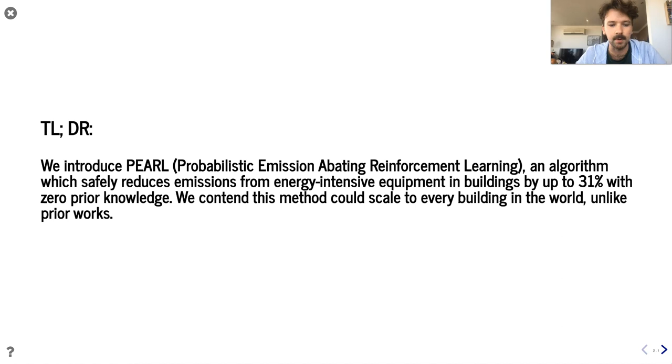The TLDR of this work is as follows. We introduced PEARL, Probabilistic Emission-Abating Reinforcement Learning, an algorithm which safely reduces emissions from energy-intensive equipment in buildings by up to 31% with zero prior knowledge. Because we can bypass the previously held requirement of historical data or access to a simulator for each building we'd like to control, we contend that this method could scale to every building in the world, unlike prior works. If this is interesting to you, please listen on.

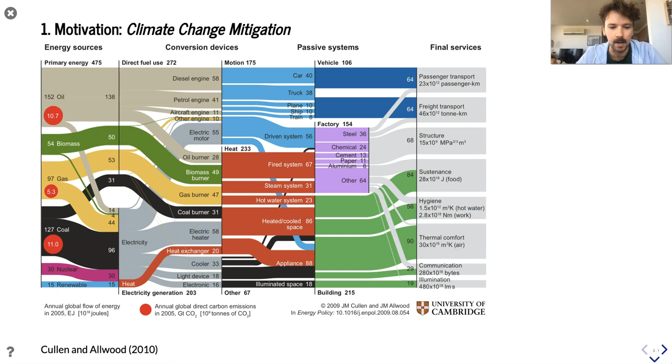I'll begin by motivating the problem, with the first motivation being climate change mitigation. Here's a map tracing the global flow of energy from primary source on the left-hand side of the screen to final service on the right-hand side of the screen. If we focus on the middle slice of the diagram, we see that global energy use can be stratified into one of three categories. Energy used to create motion in cyan, energy used to regulate temperature in red, and energy used for everything else in black.

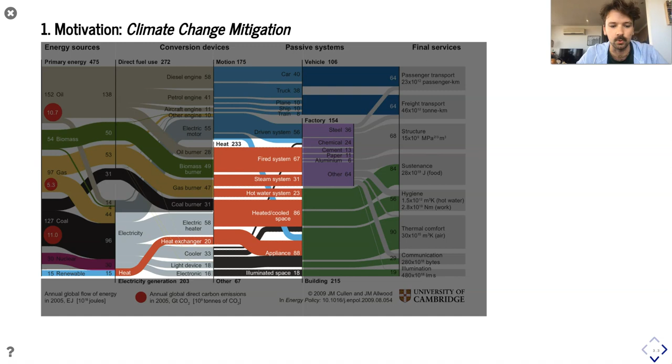We can observe that the primary source of energy consumption globally is in regulating temperature, approximately 50% of total energy demand. Finding ways of regulating temperature in society more efficiently could prove a useful way of reducing energy and thus carbon emissions. Another part of the diagram I'd like to draw your attention to is the blue section labelled renewables in the bottom left. Though renewables contributed to a small percentage of global energy supply when this diagram was produced, using data in 2005, the IEA expect renewables to contribute to 75% of global energy supply by 2050. Such a high penetration of renewables on the grid will cause problems related primarily to the stochastic nature of renewable energy generation, often a problem called intermittency.

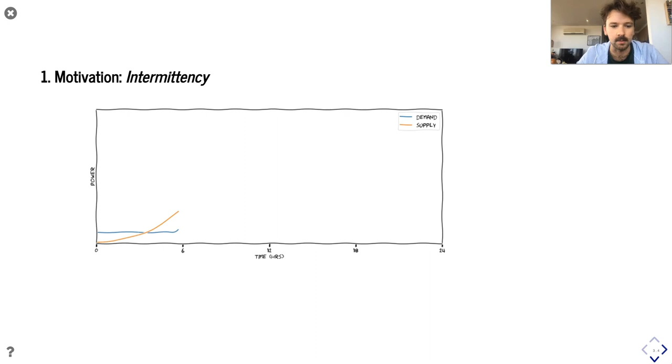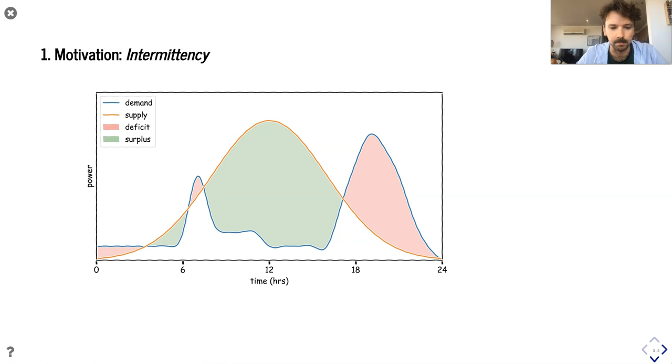To explain intermittency, consider the hypothetical scenario of powering a home using only a solar array located on its roof. Here we plot demand for energy in blue and the supply of energy from the solar array in orange for 24 hours. On a perfectly clear summer's day, the energy supplied by our array will increase in the morning as the sun rises, peak around midday when irradiance is highest, and fall in the evening as the sun sets. In contrast, the occupants' demand for energy won't be so symmetric. They'll likely produce a peak in energy demand in the morning when they wake up, a plateau in the middle when they go to work or school, and a second peak in the evening when they return. These mismatched curves create periods where demand exceeds supply, and the national grid will need to cover the deficit by spinning up fossil fuel-powered reserves, creating unnecessary emissions that could have been avoided.

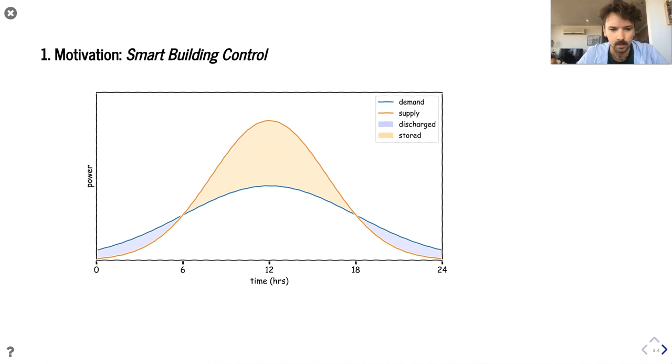Here's an illustration of an idealized scenario. Now we've added a storage medium, either electrical or thermal, and we flattened the blue demand curve, spreading it throughout the day rather than allowing the peaks in the morning and evenings. Clearly, traditional controllers cannot perform this optimization, so we need new techniques. A well-studied solution is reinforcement learning, which can solve this problem given arbitrary compute or data.

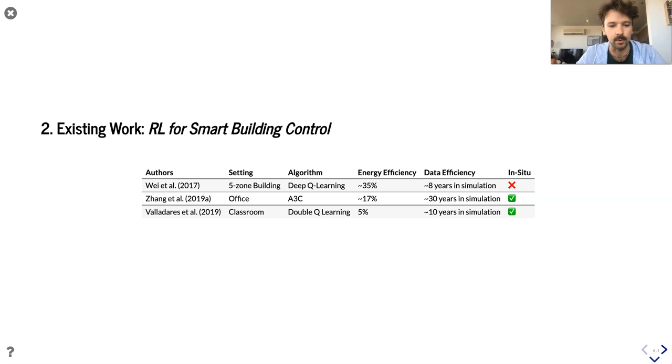Here I detail three of the seminal works in the RL for smart building control literature. Some authors report RL can improve energy efficiency by up to 35%, but all past works require pre-training of their agent in simulation prior to deployment. Such simulators can be difficult to construct, requiring lots of prior knowledge about the building, which can take an expert months to obtain and distill into a model using the favoured software, EnergyPlus. To get around this bottleneck, some authors have reported results where the agent is deployed in the building without pre-training. In our paper, we call this zero-shot building control.

Lazic and authors grant their agent a short commissioning period of 3 to 12 hours in the real environment to collect data and build a model. Their approach is suitably general for scale deployment, but only improved cooling costs by 9%, likely because they use a linear model that erroneously linearized the nonlinear thermodynamics of the data center.

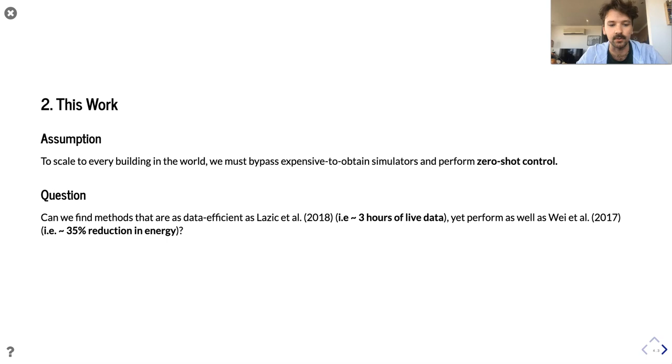So this provides the context for our work. Here we make one guiding assumption. To scale to every building in the world, we must bypass the expensive to obtain simulators and perform zero-shot control. This begs the question, can we find methods that are as data efficient as Lazic, i.e. that use 3 hours of live data to build a model, yet perform as well as the agents trained in simulation, i.e. showing a 35% energy reduction?

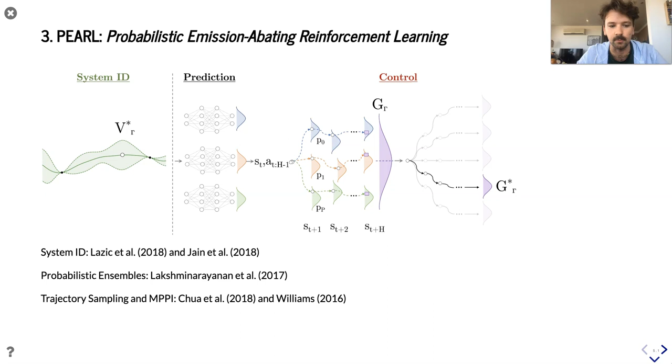In this work, we answer our question with a new approach called PEARL. PEARL performs system identification during a 3-hour commissioning period, maximizing information gained by exploring parts of the state action space where the model is least certain about the one-step dynamics. Its model is an ensemble of probabilistic networks which it uses to plan via model predictive path integral and trajectory sampling. PEARL learns the system dynamics online with no prior training.

We seek to learn a mapping F from current state and action to next state. Our model is an ensemble of probabilistic networks outputting a multivariate Gaussian over the state space. The Gaussian allows us to quantify aleatoric uncertainty in the predictions, and the ensemble allows us to quantify epistemic uncertainty, with the idea being that this improves data efficiency when operating in the online regime. We train the networks with the standard MLE loss.

We plan by combining model predictive path integral, a form of model predictive control, and trajectory sampling. At each time step, we sample action sequences from an initially arbitrary Gaussian with mean mu and scales sigma. We pass these action sequences through our models p many times to get a distribution over the state action space at horizon h. This distribution gives us an expected reward for an action sequence, which we can compare with many other sampled action sequences to find our expected optimal sequence.

During system identification, i.e. our 3-hour commissioning period, instead of optimizing for expected reward, we optimize for predicted variance across particles. The intuition here is that higher variance in our predictions means higher model uncertainty, so collecting data in this region of the state space maximizes information gain.

We formulate the problem of building control as a standard MDP with the usual state space, action space, reward function, and transition dynamics. Our reward is a linear combination of an emissions term and a temperature term. The emissions term is the grid price times our energy consumption at time t, and our goal is to minimize it. The temperature term is 0 if the temperature in the building falls between the safe bound defined between T low and T high, which are in practice set to 19 and 24 degrees centigrade. If the temperature falls outside these zones, the agent receives a large negative penalty in proportion to said deviation.

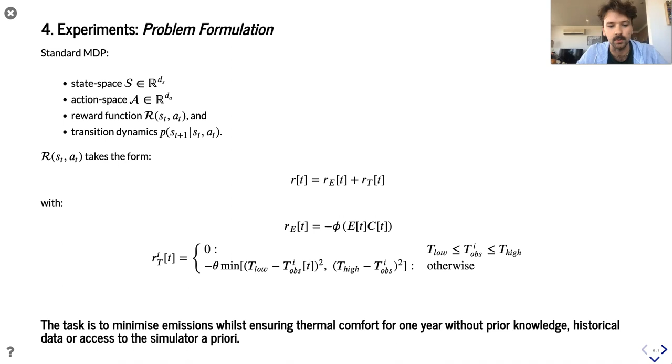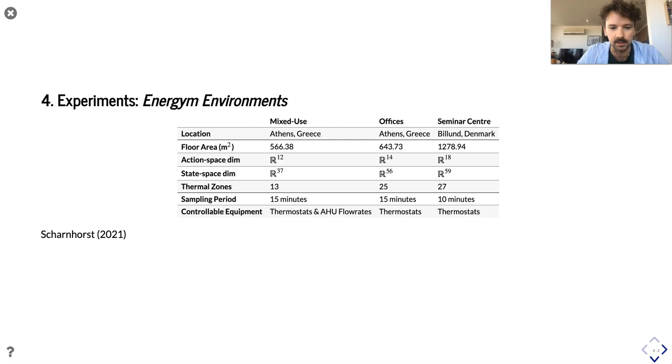We perform experiments in Energym, an open source framework for testing RL algorithms in simulation. We use their mixed-use, office and seminar center environments, which have varying sizes, equipment, and thermodynamics. Our baselines are 2 model-free algorithms, SAC and PPO, 1 model-based algorithm, MPC DNN, and the existing rule-based controller. We also baseline against an oracle, which in this case is a pre-trained SAC agent with hyperparameters optimized for each environment and trained for 10 years prior to test time. Our oracle represents performance in each environment with the constraint of no knowledge a priori relaxed.

We find PEARL minimizes emissions in the mixed-use facility, reducing emissions by 31% compared to the RBC. In the office environment, PEARL outperforms each of the RL agents but is beaten by the RBC, and in the seminar center, all controllers perform almost identically.

From a temperature perspective, PEARL outperforms all of the other RL agents, controlling the building safely throughout the year. The green band is thermal comfort constraints, and PEARL is only outside of it for 0.5% of the year in the mixed-use facility, 1.5% of the year in the office, and never in the seminar center. In contrast, the other RL algorithms miss it quite regularly, in most cases far too regularly for them to be considered safely deployable.

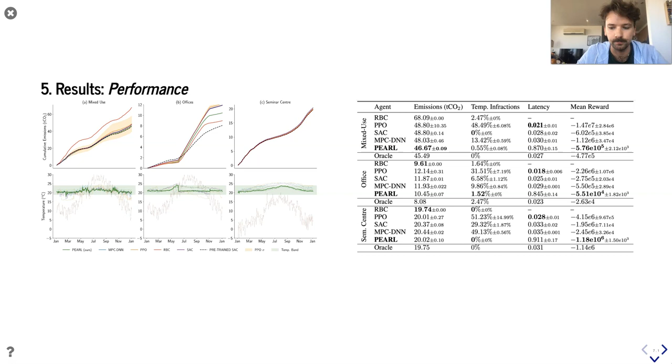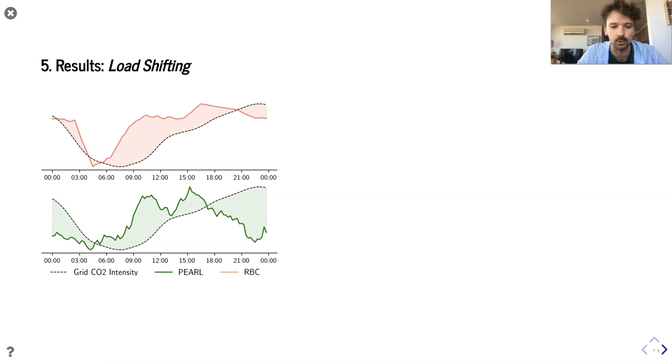We conclude with 3 key takeaways. To scale RL control to every building in the world, we must bypass expensive to obtain simulators. PEARL bypasses such simulators by operating solely in the online regime and safely reduces emissions by up to 31%. And performance correlates more with the planning algorithm than choice of model.